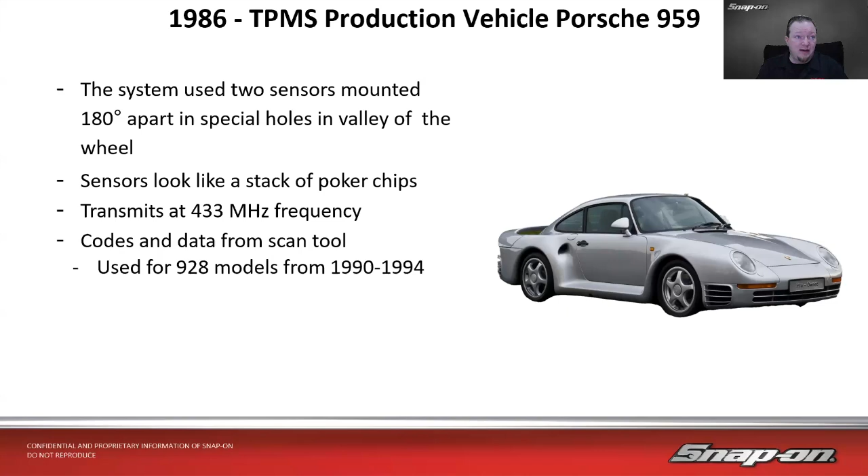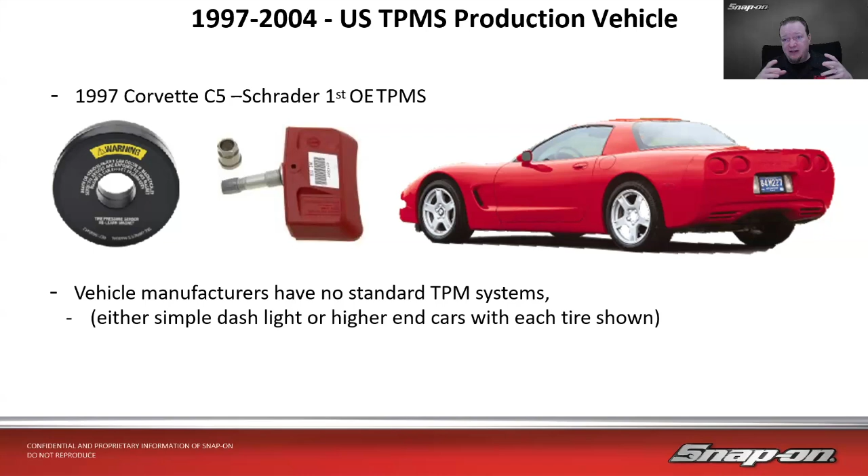Back then, vehicle manufacturers really had no standard tire pressure monitoring systems. They used either a simple dash light, or on higher end cars would have each tire shown. Nowadays, it's kind of standardized, I guess, but there's still many different ways to work on them, relearn them, and so on. But as far as the sensor types, there's only really a couple different sensors.

And that brings us to 2000 with the TREAD Act and the National Recall System. So in the United States, a large U.S. vehicle manufacturer recalled a bunch of vehicles. If you remember back then, or kind of know the story, you know who that was. A bunch of rollovers and a bunch of deaths, unfortunately - 279 accident deaths over, I don't know what the span of time was.

They also recalled a total of 14.4 million tires. Now, this TREAD Act says the law intends to increase consumer safety by mandating TPMS on all vehicles under 10,000 pounds, starting in 2004, and it was assigned to the National Highway Traffic Safety Administration to administer.

They must notify the driver when the tire is below 25% by a dashboard warning light within 20 minutes of that happening. A little bit later, they ended up implementing this in Europe as well, and up to a stricter standard, of course, like they usually do. This act was signed November 1st of 2000.

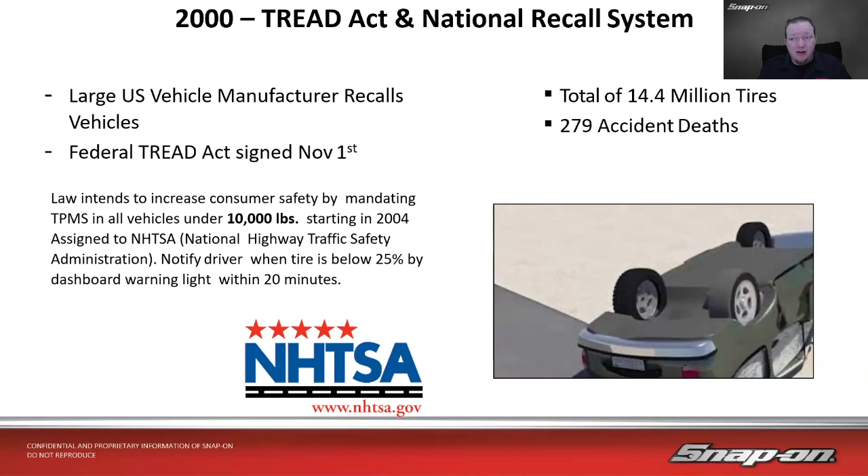Nowadays, not sure when it actually came online. We don't have that as part of this history, but big rigs and large trucks now have this on them as well. And it's not just cars and trucks either - we've got motorcycles, we've got trailers. We're going to talk more about that in a little bit.

So the light requirement that came out in this act is you need to have a solid light if tire pressure is detected under or over 25% of the OE door placard value. And if we change tires, we change what we need to set our pressures to, we need to actually go in with the scan tool and adjust that.

If it's flashing 60 seconds then a solid light, that means at least one sensor isn't communicating with the vehicle. Could be a dead battery in the sensor, could be a damaged sensor, could be an incorrect relearn. When you start a relearn, often it wipes out what was already in the module, so if you can't relearn it properly, it could cause a problem there.

Or an additional tire pressure monitor component failure, such as the module, the wheel initiator, the ECU, and you would need a scan tool to go in and scan that.

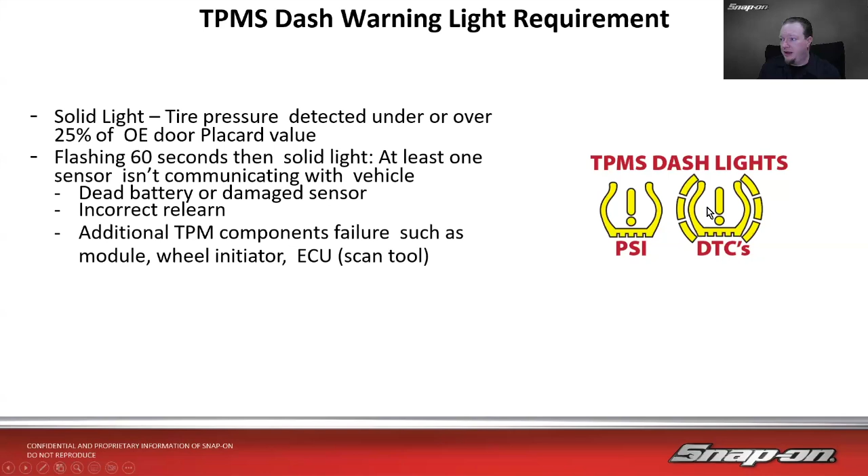Now, many cars, you will see that PSI light. So if I have a pressure issue, this will come on, or it'll flash if we have one of those problems. On some vehicles, it will also have this alternative logo here, or icon, I guess you could say, that dash light for any DTCs. So if you have a pressure warning, you get this. If you have any codes, you get this. Not all vehicles have that, but if you see that, that's really what that means.

Now, how's the system laid out? How's it work? So each tire, each wheel has a sensor in it at the tire pressure valve stem - left front, right rear, left rear, and also the spare, depending on the vehicle. And also it would work on dually vehicles too, so you have inner and outer rear tires, so it would have a procedure for that.

Each of these has a unique ID, transmitting ID number, so the computer needs to know which one of those is installed on the vehicle and what corner it's installed on. So this is very important if you do any tire work and you put the tires in a different corner of the car, like you do a rotation or something like that, the computer needs to know, because otherwise it may mislead the driver.

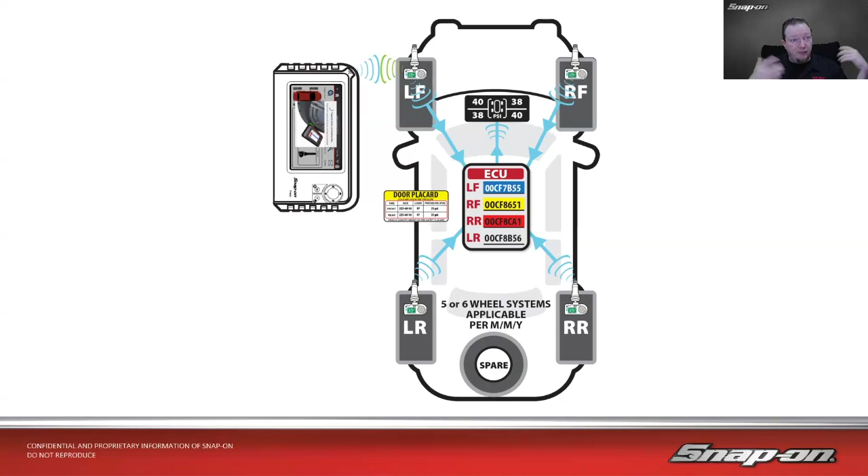So if I did a rotation and I did not relearn these to the vehicle, then the vehicle may say, oh, well, now that tire is 24 pounds and it's the right front when really it's the left rear. So it can confuse the driver, confuse the owner. If the system doesn't know what's where, then that could be a problem, so we need to relearn them.

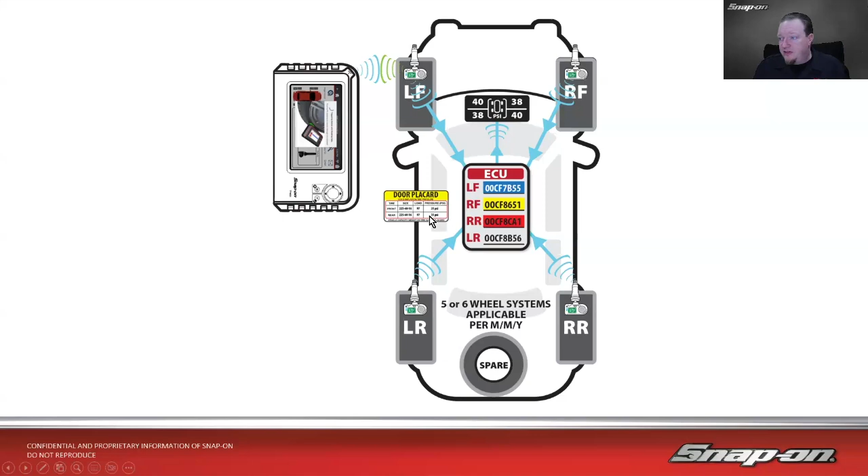We're going to walk through a couple different ways to relearn them, and it's by no means an extensive list tonight, but you often do need a tool specialized for tire pressure monitoring. In this case, we have a TPMS 5 shown here, and you want to make sure it's set to the door placard, so 35 PSI in this case, it looks like, and then it just transmits.

So a closer look at the transmitter. It's going to have different protocols on it - the software is called a protocol. It can measure pressure, which is the most common, temperature on some of the newer ones, ID number would be common, transmission time would be maybe on a newer one, frequency - the transmitting frequency of 315 or 433 megahertz. Like I said, that's kind of important. Or even newer ones, 2.4 gigahertz Bluetooth low energy.

It can also give you a battery status, whether it's low or normal. It's got a little RF antenna in there, though it doesn't actually look like an antenna - it's actually built as part of the piece.

Now, this is one thing a lot of people seem to have forgotten at the beginning. Maybe it's more common now, but back when tire pressure monitoring started, they didn't really take into consideration that the battery has a life - 7 to 10 years on average.

As far as I know, my tire pressure sensors have never been changed in my car. My car's 13 years old, and as far as I know they're still original and the battery still reads okay. I actually just read them this afternoon to get a screenshot.

So maybe they've been replaced - I've never seen it as a line item when I get my tires done. I've had the tires replaced a couple times, never seen it there, so not sure if they just threw it in, but as far as I know they're still original. So they can last longer than 10 years, I guess. 7 to 10 years average life, could be longer, could be shorter.

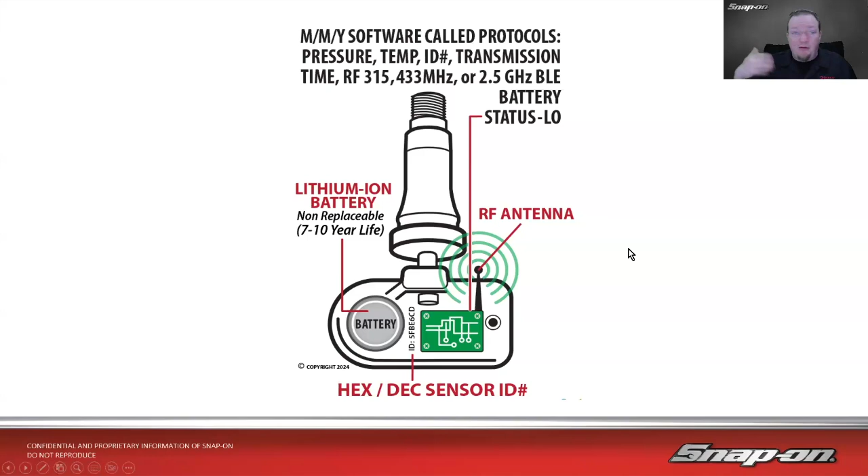But that would throw a code, right? Because it wouldn't be able to transmit if the battery's dead.

The most common types you're going to see out there are banded, clamp-in, and snap-in. Now, the banded ones are not very common anymore - they were kind of common early on, most Fords would use them, and they discontinued them around 2009, 2010. That's where a band wraps around the entire wheel and clamps it in place in the center of the tire. The transmitter and the pressure sensor are built right into one unit.

Now, I have seen some aftermarket ones where you can add aftermarket tire pressure monitoring to your vehicle, or maybe for a trailer - you can add them onto the trailer tires so you can check your tire pressure from the cab. So some of those are banded, but that's not very common on just a regular factory vehicle now.

The snap-in basically just takes the place of a regular valve stem, snaps in just like a regular valve stem, and then we have the electronics package on the back, which has a little torque screw that will screw into the valve.

And I will tell you, up where I live, and anywhere in the Rust Belt or anywhere in the north of North America where they put a bunch of salt and other chemicals on the roads in the winter to dissolve the snow, these things get corroded pretty quick, and then you can't take them off. So most of the time when you try to take them off, you end up breaking them. I've had to cut them with a die grinder just to get them off, to replace them with new ones.

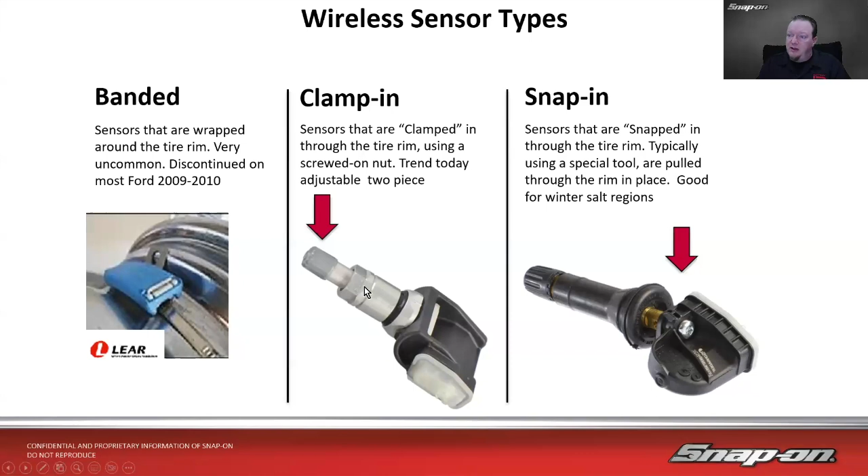Most common on these, and even these plastic caps would break all the time too. So from 2007 to 2020, Schrader was the biggest supplier of rubber snap-in valves. There's the different types that they had - you can see where the air would go in, and then you can see where the sensor package actually bolts on there. 75 to 80% of the market was that rubber snap-in; the rest would most likely be the clamp-in.

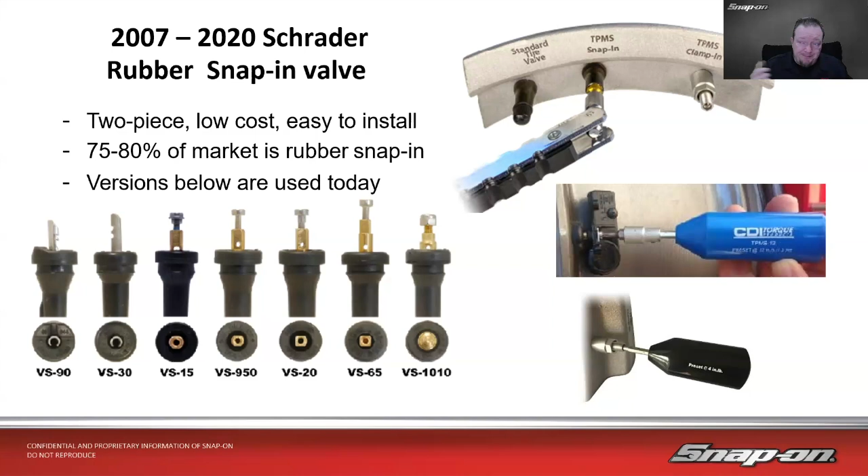It's two-piece, low cost, and easy to install. You also need some special tooling. In this case, they're preset torque, for the torque bit or torque screw that goes right into the valve stem. For the Schrader valve, you need to make sure you don't over tighten it. There's also a special tool for the nuts on the clamp-in ones, set to a special torque, because you don't want to over torque them or you'll break them. They're pretty fragile that way.

As far as measurement is concerned, 94% of the US market uses direct measurement. That's your majority of cars from when they started, 08 to 2012 Accords, Acuras, etc.

Indirect is where they don't use a tire pressure sensor, actually. They use a wheel speed sensor in order to measure it. Some Audis, newer Hondas—I rented a Hyundai that had it. So they don't have the actual tire pressure sensor in there, just regular standard tire valves. They use the deviation from wheel speed to detect whether or not that wheel, or that tire, is low.

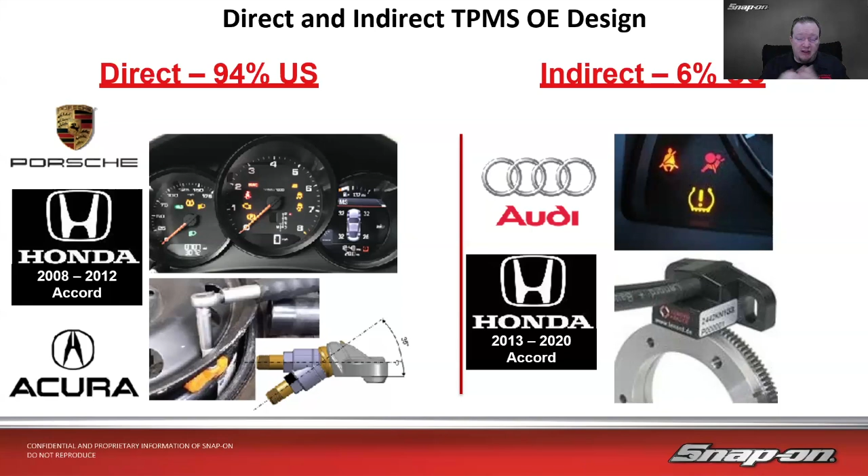In 2009, VDO introduced a multi-application sensor, what they call a Redi-Sensor. It offers 6 to 7 different part numbers available in both 315 and 433 megahertz applications, depending on what the manufacturer needs. All the OE software is stacked on a single sensor chip, so I can duplicate OE sensors—I can just clone them, if you want to think of it that way. We call it cloning. You take the data off of one, put it on another one, and the car doesn't have any idea that anything changed.

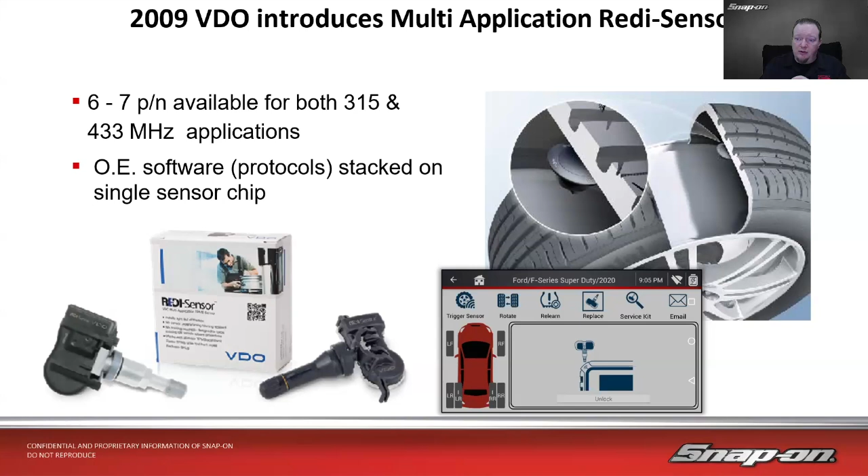So we can see that there. You can actually go into the tool, go to replace, and unlock the sensor. Some sensors need to be unlocked to do that, and it would allow you to. That's pretty handy for a shop owner—you only have to carry like 7 different part numbers of a sensor, and then you can program them at will. They're basically a blank sensor. You just copy and paste the information off the old one onto the new one. I could see how that would be helpful.

But there are over 20 brands of programmable sensors that we do cover in our tool, and that would be the TPMS 5, able to do relearns and such. There's really only 2 in the aftermarket that we know of that aren't covered. One is the Autel one, because that's tied to the tool—you have to use Autel sensors with their tool, or the tool with the sensors, put it that way. Then Schrader actually has one. Schrader has 2 types of valves: one that's universal, can be used by anything, and one that's tied to their actual tool for tire pressure monitoring. So those are really the only 2 sensors on the aftermarket that we know of that we don't cover.

You can actually go in the tool and see what's the OE part number, what's the frequency—it's built into the tool. You can also pick any of the brands, and then there's high lines, low lines, steel wheels, alloy wheels, clamp-ins, snap-ins, etc. You can sort through the list and find the year and the type and so on, for the different softwares, and then just go in and clone them. I can pull the data that I need, like the ID number and stuff like that, off the existing one, and program it into a new, blank sensor, and then it just works.

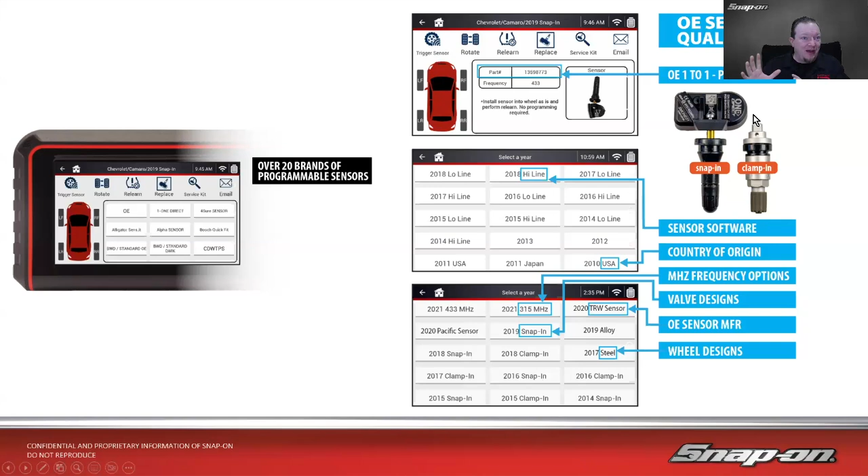Notice how the newer style clamp-in sensors also have a removable sensor. That saves the problem—I probably never have to take this off again once I put it on. It solves the problem of corrosion, and I can just replace the actual sensor body itself and leave that stem in there, without having to bother cutting it off or anything.

Now in the shops, technicians face no standard service relearns. It's really the same at the beginning as it is now. It's every manufacturer for themselves. There really is no right or wrong way to do it.

There is no standardized way to do it. GM in this case says 33 procedures, actually a few more than that now, and they're usually stationary where you do it in the bay. BMW has 15 different procedures, and it's automatic where you drive it down the road. You set the tire pressures a certain way.

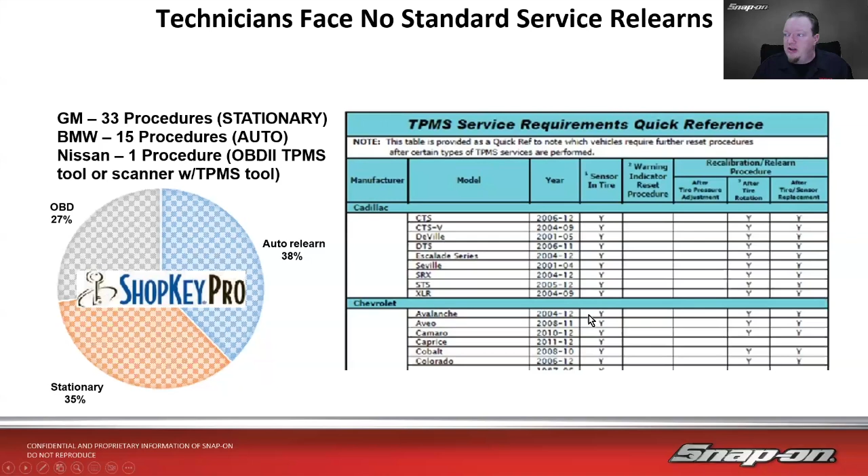Nissan actually has a couple different procedures now, but one that was most common for the longest period of time, you can do it with the TPMS tool or without, and it tells you how to do that, which we'll show in a little bit. But here's just a quick reference, a sample of GM vehicles, and there's totally different ways to do it. So some different reset procedures out in the industry.

One good way to find the reset procedures, if you have a Snap-on tool, is quick lookups. As long as you have Wi-Fi and current software on the tool, you can access the quick lookups. We have an option for tire and wheel service. We also have oil specs and TSBs on the Zeus, but oil specs on all the other ones as well.

This is an example of an 18 GMC Acadia. That's procedure number 11. It's going to walk through the entire process. You press and hold the select button on the driver information center, and it'll say tire learning active. Then you use a sensor activation tool like a TPMS 4 or TPMS 5, and activate starting front left to the rear left.

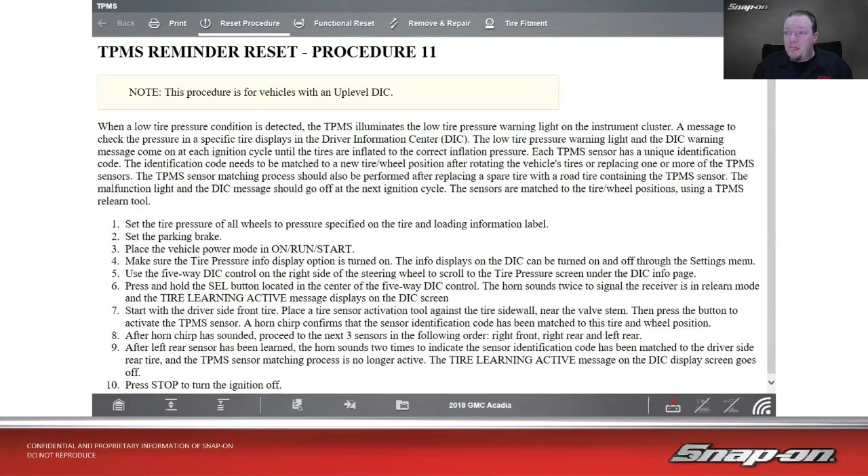So you go clockwise around - left front, right front, right rear, left rear. I have never seen a manufacturer do it a different way. Now they may have different ways of putting it in learn mode, different ways of activating it, but they always start with the left front and end with the left rear, making a clockwise circle around the wheel. So I guess there's one thing that's standardized in the industry. That's how it knows what wheel is on what corner.

Here's another example for a 2018 BMW, and you actually do that inside from the My Vehicle and iDrive menu. Then reset tire pressure monitor, start the engine with do not drive off, reset the inflation pressure, and then drive away. It'll learn it after driving over 19 miles an hour for a short period, and it will tell you when it's done.

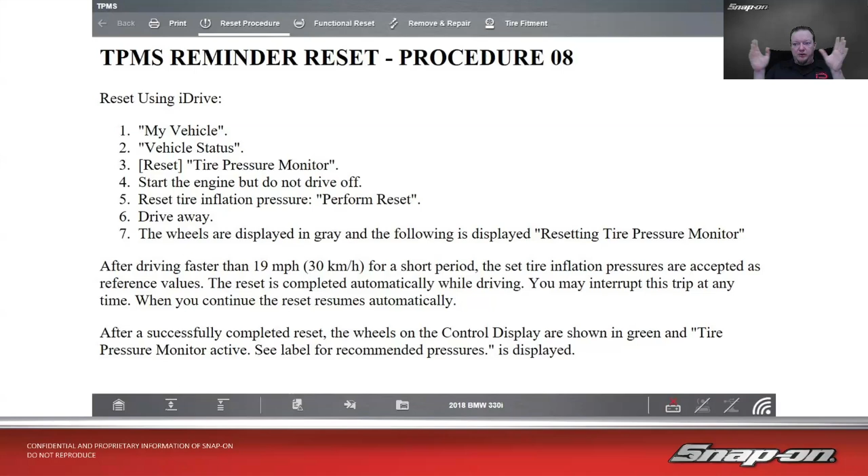Then for a 2018 Ram 1500, which is a pretty common vehicle, there is no actual reset procedure to do - you have to do it with the scan tool. So from here, we could go into functional resets, which brings us into the scan tool. In this case, it's an 18, so it is security link access, and then you go in and it says program the IDs.

So I actually have to go in and type the number of that sensor. Let's say I picked the left front. This function should be used to write the left front tire sensor ID in the ECU. You hit continue, and it'll tell you what the current ID is. Make sure you have the 8-character sensor ID available - it can be found on the tire sensor label, or using the tire pressure monitoring tool.

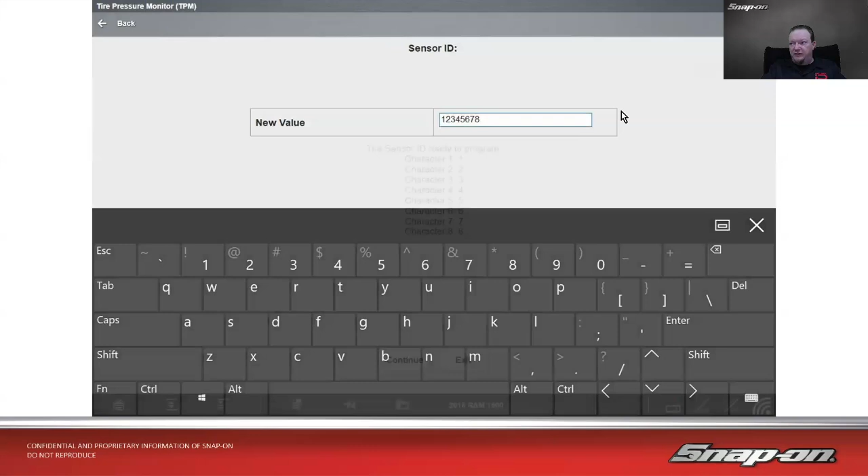You can extract that from there, and some vehicles will actually have that as data PIDs as well, so you can do that. Just make sure the tire's in the right spot, because the computer only knows where it's programmed to. You go in there, you hit edit, and that's going to walk you through. You type in your sensor ID, hit OK. It's going to verify, and it's going to say it's successful when it's done.

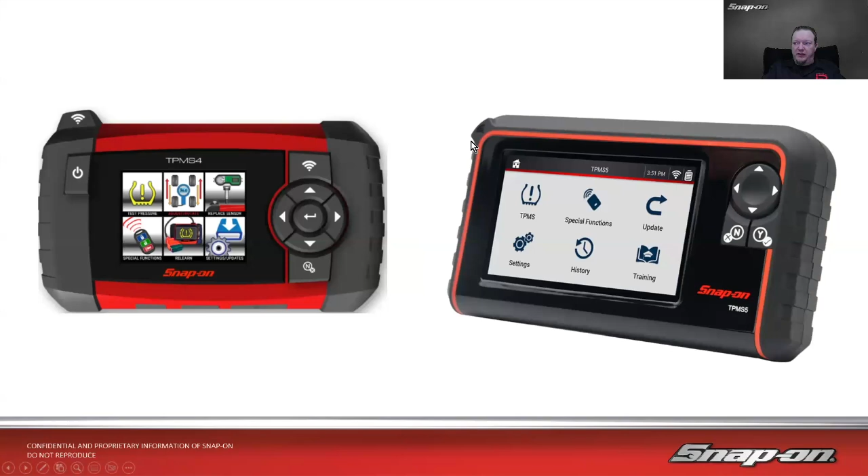Here's another example on that Nissan procedure I talked about. We have one with a transmitter activation tool and one without. If we go into functional reset, it'll bring us there, to TPMS registration with the J45295 tool or without. That J tool is one of these, something that can activate a sensor. It's got a little antenna on there, and you can go in and activate the sensor.

Without the tool, and with existing sensors, because if they have new sensors, you have to use the tool. But if you don't have the tool and you have existing sensors in the vehicle and you just need to relearn it, what you need to do is set the tire pressure according to what they want. Different models have different pressures. This isn't the only way to do that.

So left front's 34, right front's 31, right rear 29, and left rear is 26. That's going around clockwise again on the vehicle. You set them to that, and then you drive the vehicle, and it senses, okay, I see 34 PSI in that tire, so that must be the left front, type of thing. So you probably want a pretty accurate gauge on that as well.

Then it says continue to start the test, and then we drive the vehicle 5 to 15 minutes until it says test completed. So that's using the scan tool without the TPMS tool. Other times you need to use the TPMS tool in conjunction with the scanner.

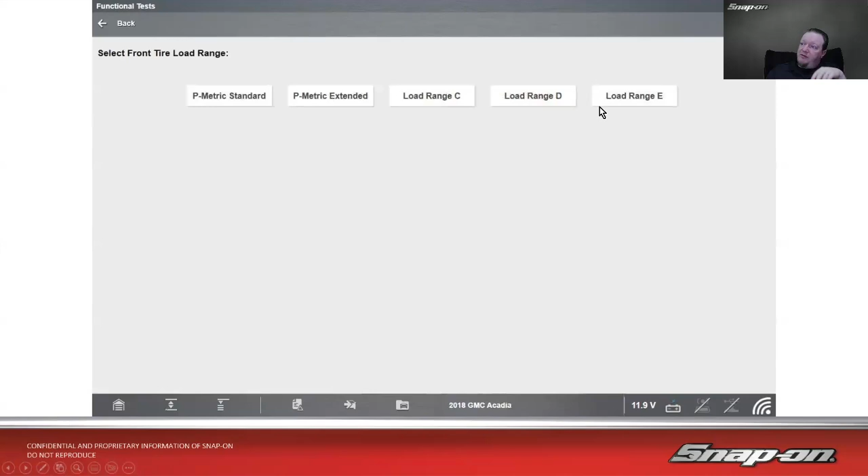Here's another couple examples of things we can do related to tire pressure monitoring with a scan tool, many scan tools can do this. Tire type and pressure selection on the 2018 Acadia. We choose what type of tire it is, and then we can change the pressure. Edit for the front, you can go anywhere from 26 to 95 PSI.

Just choose the one you want. Let's say we wanted 44. Go in there, hit continue, and then it has you do the rear as well. Hit continue again, and it'll program those values into the TPMS.

What if I have a dead sensor that's not transmitting? Sometimes I can still extract it using a TPMS tool. Otherwise, I can go into PID data, sometimes it'll be there as well. So if my sensor isn't communicating, it's dead or something like that, sometimes I can get the information off of it if it's got just enough juice.

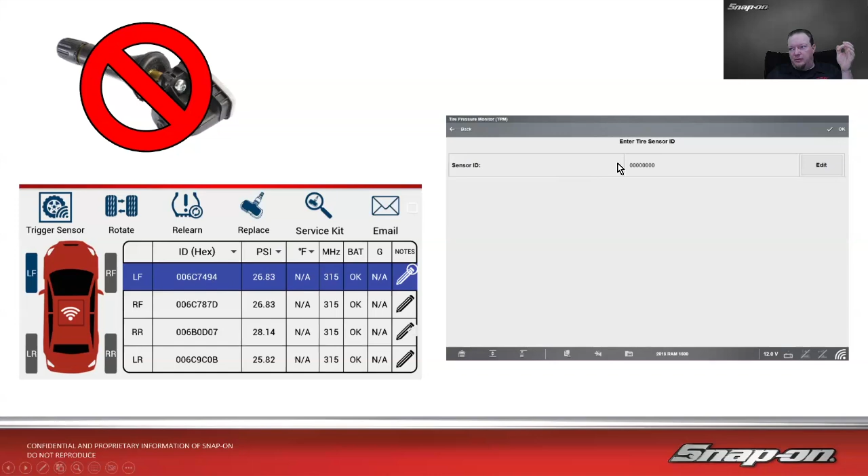Other times I can go with PID data, but that's in the case where I may need to manually enter that sensor ID, like on that RAM. I would take that number right there, that 8-digit number, and punch it in there, and that would be the left front.

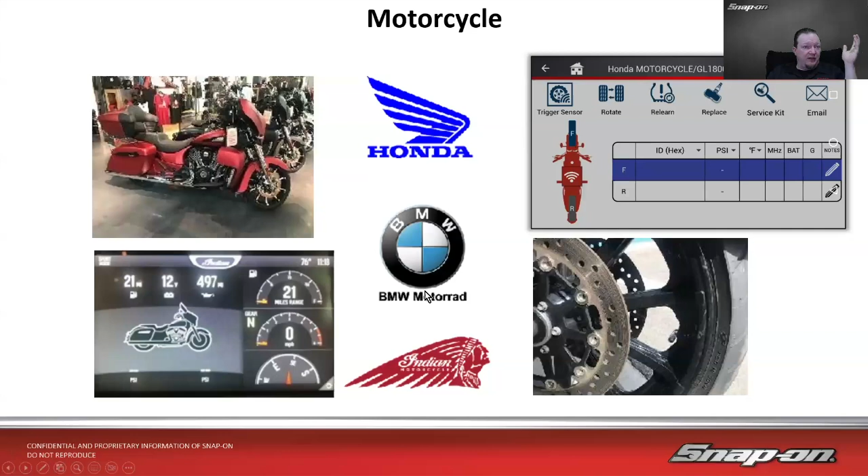Motorcycles have TPMS now too, and that's capable on the TPMS 5. You just ID the vehicle. In this case, we got a 2020 GL 1800 Honda, and it has ID numbers for the front and rear. You can ping them with the tool as well. So there's a couple of Hondas, BMWs, Indians, Harley Davidson. Somebody had a question on the last class about Harley, and yeah, that's in the tool as well.

That's not in the scan tool, it's in the tire pressure monitoring tool. So it's available. Also, dually trucks over 10,000 pounds, like your 1-tons and over, they have 6 tires plus a spare, so you can do 7 actually: left front, right rear, inner right rear, left rear, inner left rear. That's how you do that, and I'll just walk you through that.

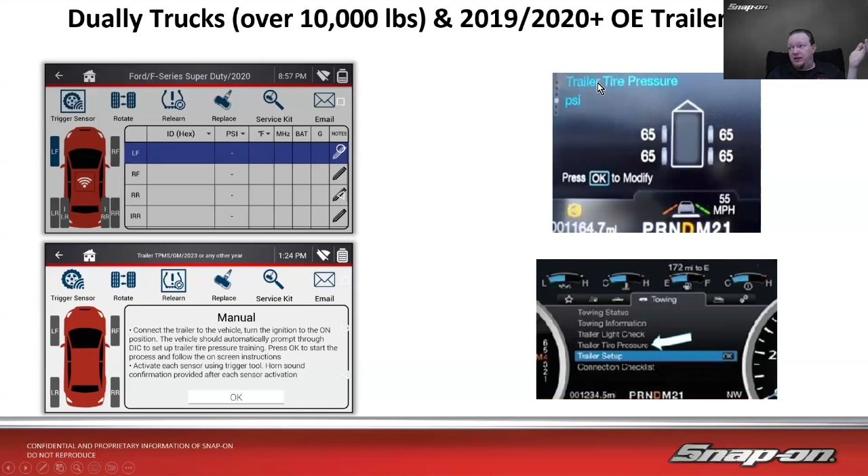Also trailers, so you can look up trailer TPMS, GM, Ford, whatever. You may have to go into the vehicle and into a trailer setup in the driver information center to set that up, but then it'll show you your trailer tire pressure as well. That's on some vehicles, 2019 and 2020 and newer. Some vehicles have it, and we can do that.

Also, the newest game in town is going to be 2.4 gigahertz Bluetooth. It actually uses Bluetooth low energy, and Tesla is the one who uses that right now. I actually got one in front of me right here. This says BLE, Bluetooth low energy. This one's actually a clamp-in style too, it's got a little screw. You probably can't really see it with the camera, but it's got a little screw there. It screws in and clamps on the rim.

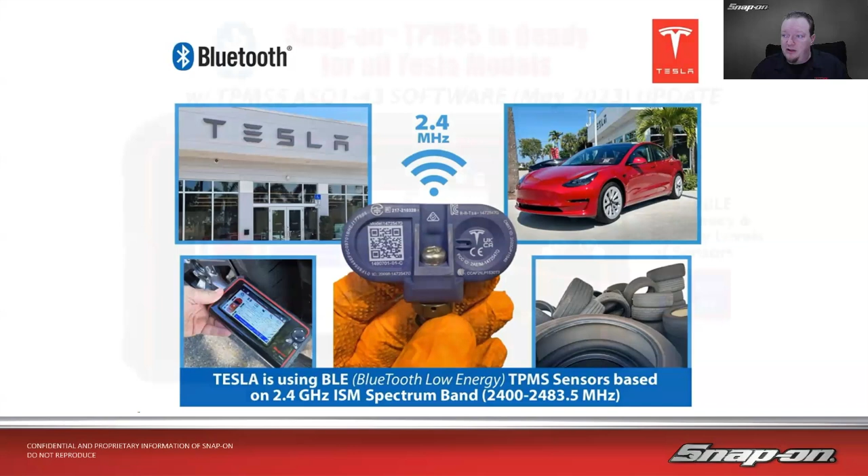It's got a little screw in the back, just like any other clamp-in, but the actual sensor itself is Bluetooth, not radio frequency. That's available, and it's also available in the tool, as long as it's updated May 2023 or newer, it has that capability built in. It'll tell you the frequency, in this case 2.4 gigahertz, how strong the battery is in millivolts, and what the ID numbers are as well.

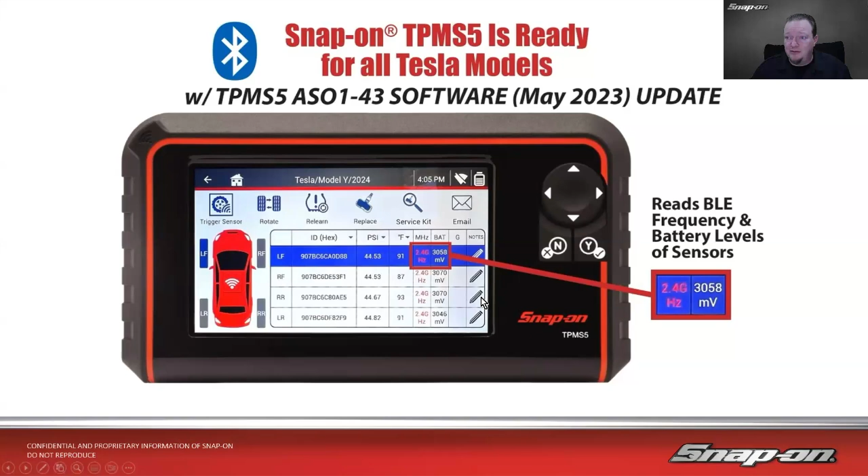So if you're doing Tesla wheels and tires, I hear the tires don't last that long on them because they're heavy, so this might be something that's necessary, and it's available with an update.

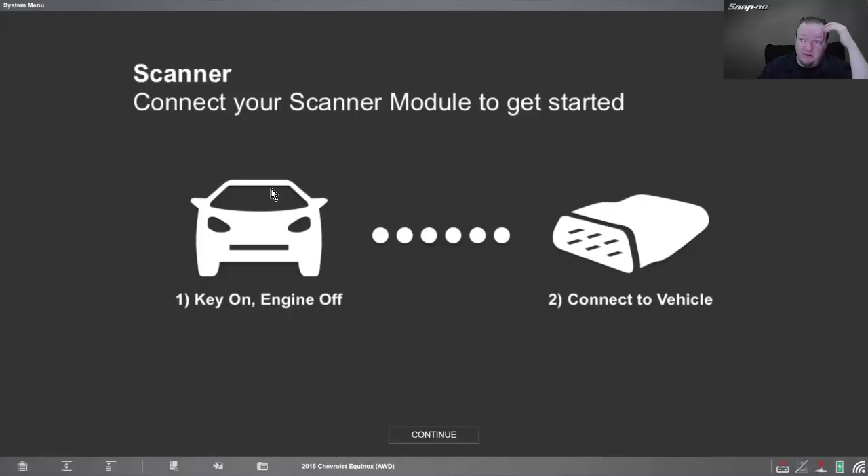All right, let's go live on the scan tool, since I can't hook up my TPMS tool to the internet to see, but we can go live on the scan tool. I'm going to pull up a few vehicles we have here. The first one's going to be a Chevy Equinox 2016. It's going to be awfully similar to that GMC Acadia—similar, not the same, but similar.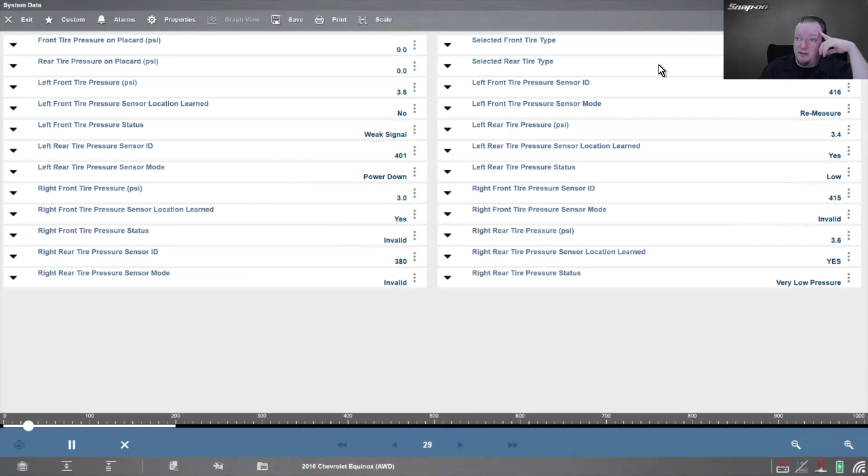So you can go in here, a couple different ways. First off, common selections usually has the tire pressure monitor right there, since that's one of the more common things to do. You can also go to codes and data, and see sensor data, which tells you your signal qualities on the sensors. Then if I go to the next data group, the system data, it gives me my pressure status, my sensor IDs—that's where you get those sensor IDs, sensor modes, location learned, yes or no, that sort of thing. You can go through all that PID data in case you needed to gather that information. We also have functional tests, tire type and pressure selection.

This is where I would go in and choose my load range first, say load range C, then change up to, say, 80 PSI for some reason—I wanted to do 80 PSI as my minimum. Continue, and it'll load the rear—say the same thing, 80 PSI, continue, and we'll load it in. There we go, done. Easy enough.

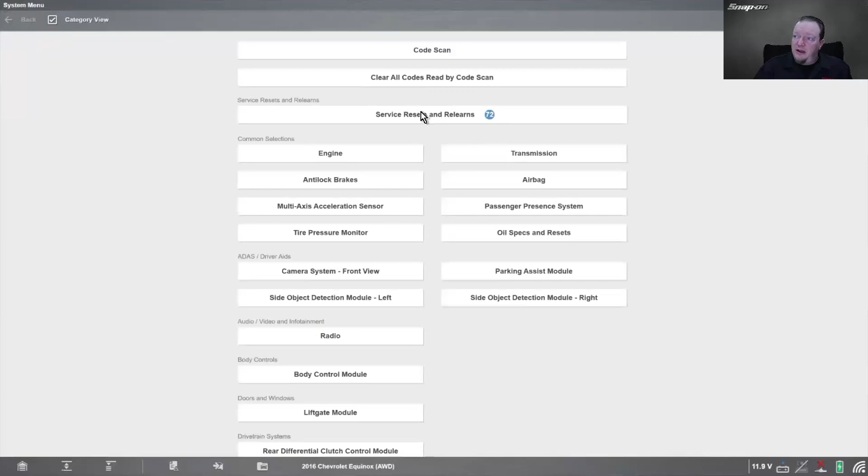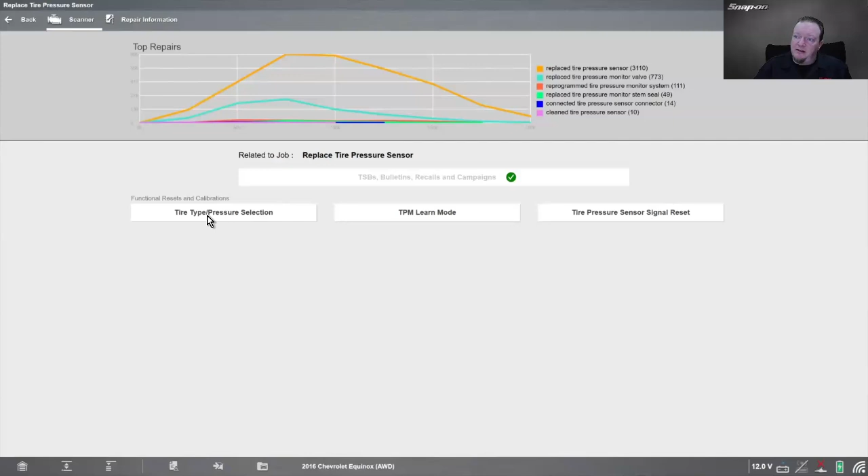It's just flipping a switch inside the module, basically, what it's doing. Now, alternatively, if I have a tool with the service resets and relearns active, I can go in here and scroll down till I get to TPMS, tire pressure monitoring system, replace tire pressure sensor. It's going to pull up some data, pull up any TSBs if applicable, and then give me all of my options—TPM learn mode, sensor signal reset, and tire type and pressure selection all on one screen, so I don't have to go into different menus to find it.

And then the third way to do it, like I said, we've got quick lookups on the front menu—tire and wheel service. There's an Equinox, and there it is, procedure 33. It's going to walk you through how to do that. Each sensor has a unique identification code, which needs to be matched to the new tire and wheel position after rotating the vehicle's tires or replacing one or more of the TPMS sensors. Okay, so that's how we do that.

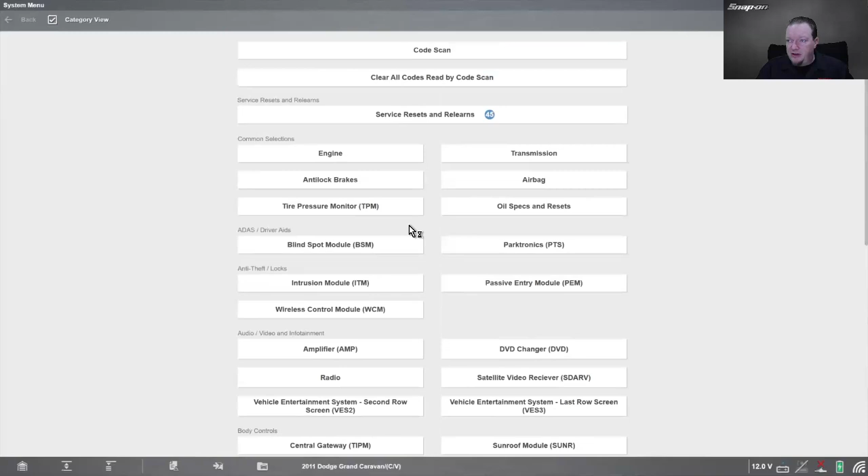Next one, Grand Caravan. This is going to be very similar to that Dodge Ram. They've been doing it this way for a while, apparently, because this is a 2011. I can go down to—oh, it's actually on the top. Never mind, remember I said that's usually on top—tire pressure monitor. Then we have codes and data, miscellaneous functions, which would be reset ECU and ECU information, and then system tests.

So that's where you go in and program the ID. You need a 7-character sensor ID—make sure it's readily available. Enter only the last 7 characters; if it has more than that, there's your current ID number. Go in there, say I wanted to do 1,2,3,4,5,6,7. You do that, verify, and it programs it in, and you're done. Of course, this is a simulator, so it's just going to go back to where it started, but if it was successful on a real live car, you would see whatever number you entered.

Then there's a rolls test. It verifies the TPM sensors are transmitting and being received by the TPM module. It should be run when new tire sensors are programmed. Vehicle speed must be above 20 miles an hour for at least 30 seconds after the procedure starts in order to force the sensor transmission. Then begin driving, just drive down the road, and when it's done it will exit and verify. I can't do that right now because I'm not driving a vehicle.

Okay, that's that. Let's do a Mercedes CLA class. So this one's a little different as well. They're all a little bit different, you're noticing, right? So we'll go to tire pressure monitor, and we'll just pick the first one. There's a lot of different variants that could be. It's going to decide which one it is based on the car.

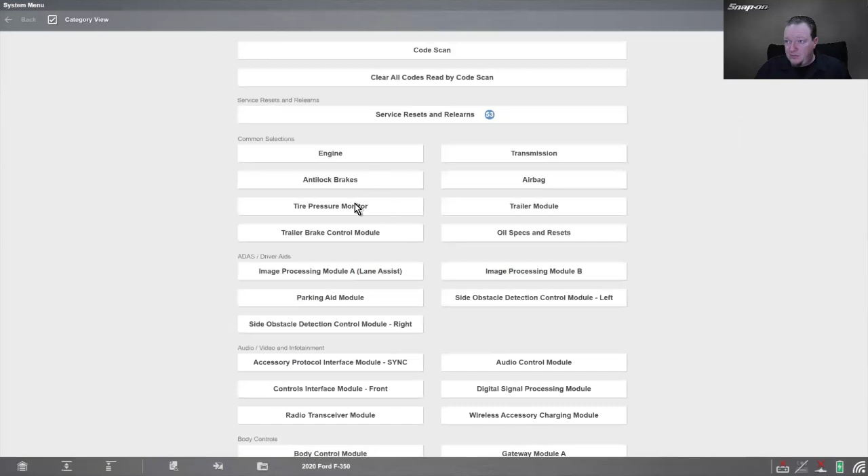And then the last one is going to be my F350. It's where we talked about the 6 or 7 tires, depending on if I do the spare. F-series, tire pressure monitor. We have tire pressure monitor in there.

Functional tests, special functions. And then we have a training mode with the scanner and training mode without a scanner. With the scanner, it's going to erase any location that's already in there, so make sure you want to erase it before you go. Hit continue, there, it erased it. That's going to tell you what your pressure is, your ID numbers are. And of course right now we're not going to have any. Then it'll sound the horn.

Then you need to use a sensor activation tool like a TPMS 4 or TPMS 5 or something of the like. Go around left front, right front, right rear, left rear. Like I said, it always goes around, outer and inner, because you notice we have the outer and inner. Right rear outer, left rear outer.

And then also training mode without scanner, so it's going to tell you the manual way to do it. How to walk through that.

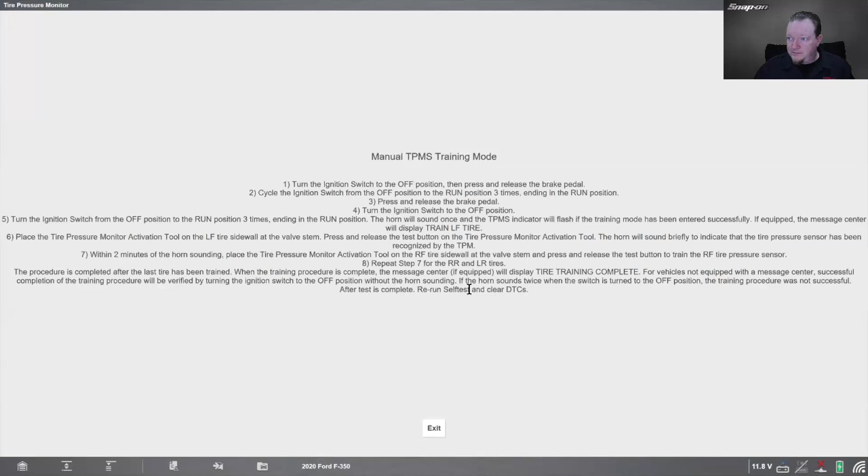So many manufacturers have many different ways of doing this. Always best bet is to read up your service information. We try very hard to make sure we put the information in the scan tool as well, in the scanner part, not just the quick lookups part, just so you have that information readily available when you're actually doing the tests. So that is tire pressure monitors. A few new enhancements, a few new advancements there in tire pressure monitors. Hope you learned a little bit, or a lot, whichever.